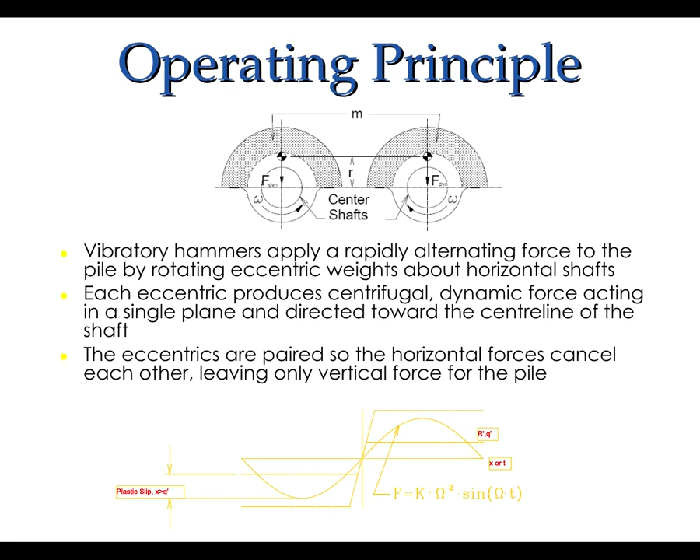To eliminate the horizontal component, which is particularly important with pile driving equipment, we pair the eccentrics and we counter-rotate them, and the horizontal forces cancel out and the vertical forces add to each other, and we get a vertical sinusoidal force. That vertical sinusoidal force then acts on the pile, which in turn acts on the soil.

Originally, the vibratory hammers were developed in the Soviet Union in the late 1940s, they were first put out. But actually, that effort started probably in the late 1930s and went on into the 1960s. It was a major effort on their part, and they pursued it very diligently, actually, and developed a wide variety of vibratory equipment, compactors, vibratory grates for conveyances and that kind of thing.

The first, for pile driving equipment, the first job was in 1949 when the BT5 was introduced, and it had a dynamic force of 214 kilonewtons, an eccentric frequency of 41.67 hertz, and a power of 28 kilowatts. It was at the Gorky, which is now Nizhny Novgorod, hydroelectric development, and there were 3,700 sheet piles, 9 to 12 meters long, and they were driven each in 2 or 3 minutes.

The performance difference between vibratory hammers and impact hammers in the right types of soils is significant, and is one of the reasons why this equipment has, for most types of soils that sheet piling is used in, become used for sheet piling. You also see them in soldier piles and other types of retaining walls.

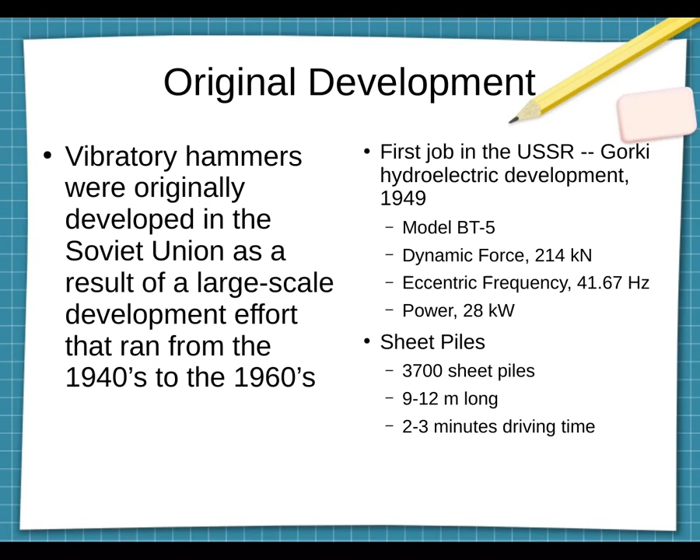This is a diagram of the BT5 vibrator. It shows all the components so that you have the regular vibrator today are there. In the top, you've got the electric motor, which transmits its torque to the gears and eccentrics through a transmission system in the upper left-hand corner.

In the middle, you have the eccentrics, and at the bottom, you have the clamp, which actually attaches it to the pile. The pile has to be attached in such a way that you get bidirectional rotation, bidirectional transmission of force. In other words, you've got up and down forces. It's not like an impact hammer where you just set it on top of it. You've got forces in both directions.

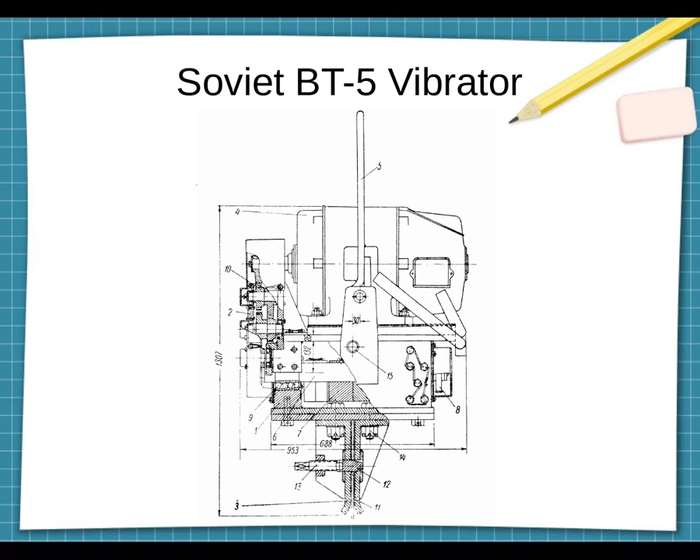The one thing that's missing from this that is more common now is the suspension. And that's normally, there are two reasons why you have suspensions. One of them is to provide extra down weight to help push the pile into the ground. And the other one is during extraction, you use it to dampen vibrations to the crane.

Subsequent developments: they developed vibratory pile drivers for large steel pipes, which are still a very common application for them, square concrete piles, and concrete cylinder piles. Concrete piles are somewhat of a different case because of their large toe areas, which I'll get into. The first vibrator you see is a Soviet B402 pile driver, with a dynamic force of 270 kilonewtons and a rotation frequency of 23.8 hertz, driving sheet piles, Larssen types, in Leningrad, which is now St. Petersburg.

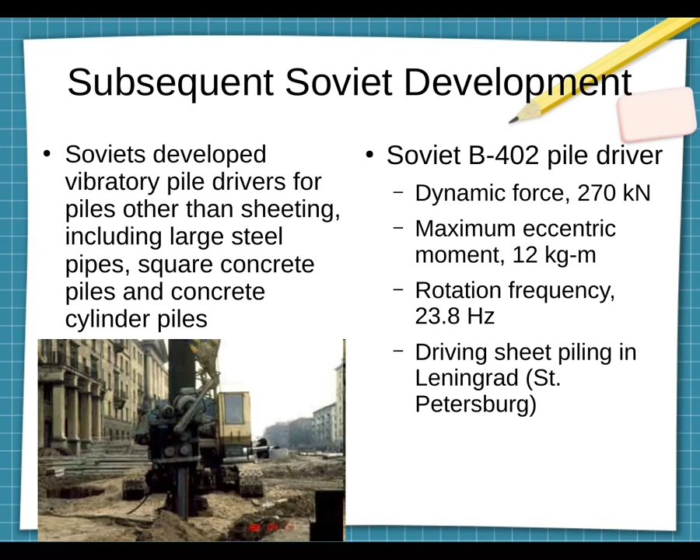The first country that received vibratory technology after the Soviet Union was Japan. They were licensed for it. Many of the Japanese machines imitated the Soviets almost slavishly in some cases. The one exception is the Uraga, which actually reversed the rotor and stator, and became a very unique machine.

Vulcan distributed that in the early 1960s. Western European manufacturers like PTC in France, which is still active in it, and some in Germany like Müller and MGF, also developed this type of equipment.

One thing worth noting is that until the late 1960s, virtually all vibratory pile drivers were electric. There is a movement now to return electric equipment to the job site for purposes of getting rid of internal combustion engines and doing clean energy, and some people say this is very novel. In fact, it is not. We have done electrics with vibratory hammers for a long, long time, and I think that's something that needs to be remembered and that experience built on.

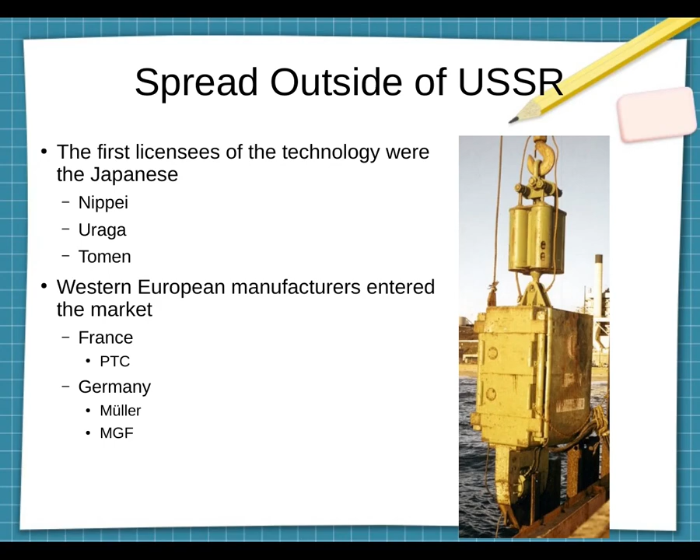In the United States, hydraulic vibratories were first developed. MKT developed the first one; you see a diagram of it from 1969. Then Foster and ICE - that's International Construction Equipment - 216 over there on the far right. Vulcan had a series back in the 1980s and 1990s, and Vulcan Foundation Equipment is once again bringing vibratory hammer manufacturing back to the area. We have HPSI and APE as well.

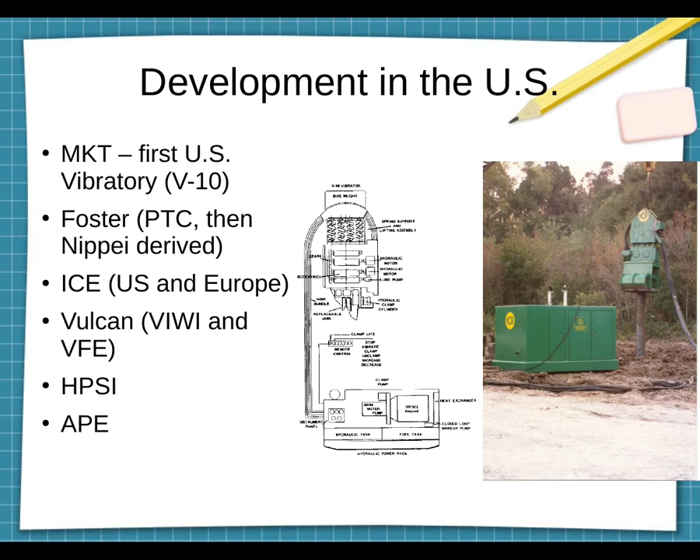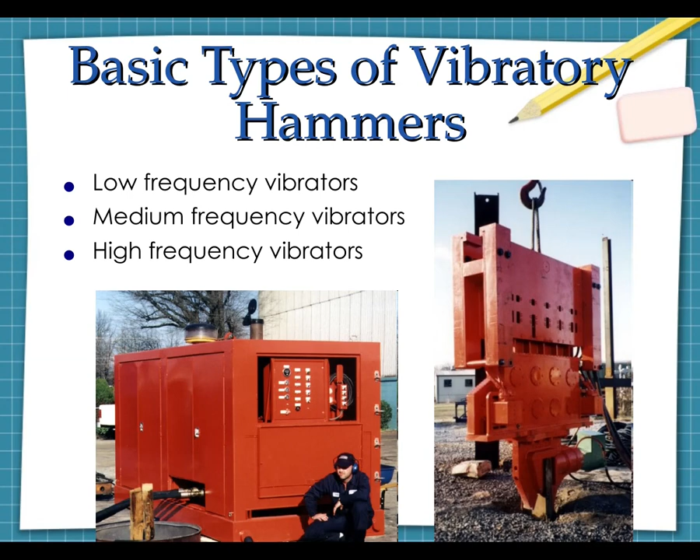There are basically three types of vibratory hammers based on their frequency ranges: low, medium, and high. What you're looking at there is a Foster 4200 unit, which Vulcan manufactured in the 1990s. On the right is basically the exciter. The bottom is the clamp, and above the clamp is the gearbox where your eccentrics are. At the top is the suspension with the suspension springs. On the left is the power pack, a hydraulic power pack. American contractors have traditionally preferred a hydraulic hammer, and this is why they were developed in this country.

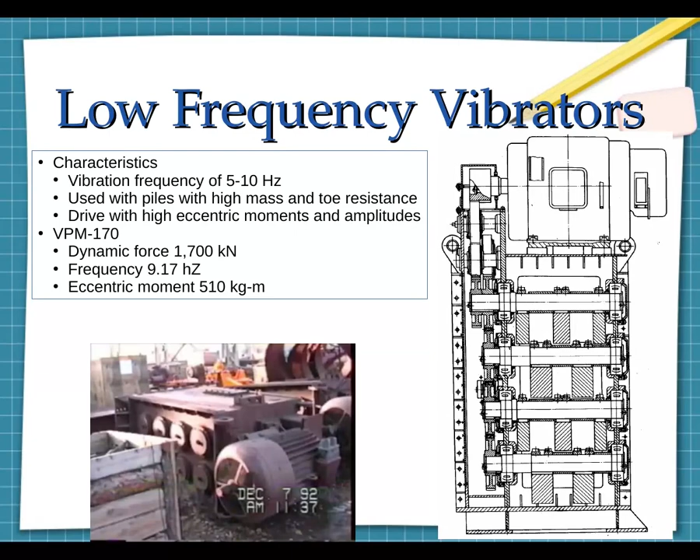Medium frequency vibrators are pretty much the standard. Those are two Vulcans, the 2300A and the 4600, which is driving a large caisson. Development of caisson driving for drilled shafts revolutionized the construction of drilled shafts in the 1970s when the larger vibratories were applied to it. This is the standard range - you have a nice balance of frequency, eccentric moment, and dynamic force, and you can drive a wide variety of piles with these.

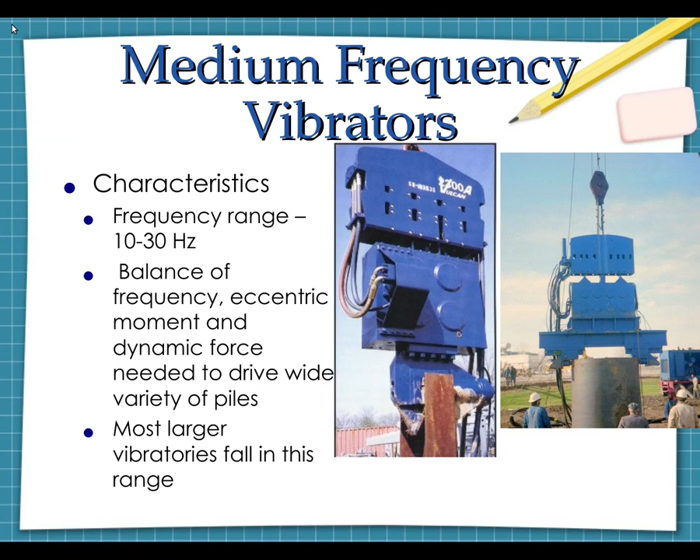The high frequency vibrators break down into two different types: the non-resonant, around 40 hertz, 2400 RPM, normally used to avoid vibrating structures around them. And resonant - traditionally vibratory hammers assume the entire pile acts as a unit, as a mass, but resonant types actually put wave effects into the pile. They've had some acceptance, but they have not made the progress in the industry that some of their proponents would like.

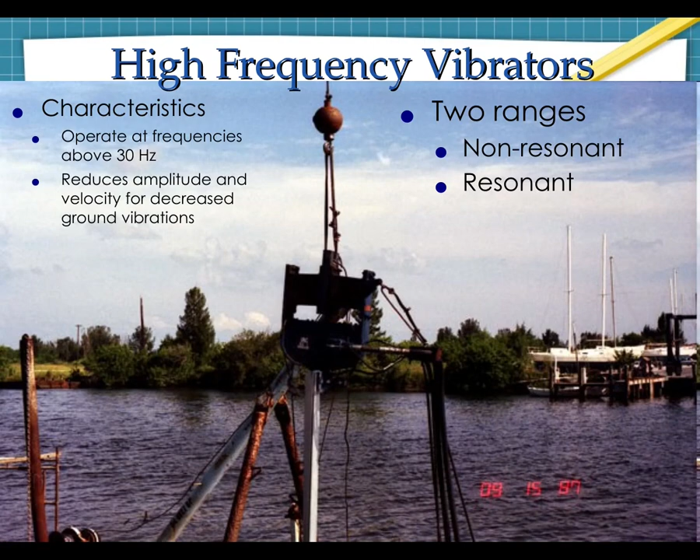Modeling vibratory driving: for purposes of modeling, the simplest model is a dashpot, which is a velocity resistance type of thing. For a liquefied soil, that makes sense, and it's traditionally been used to determine the power requirements for vibratory drivers.

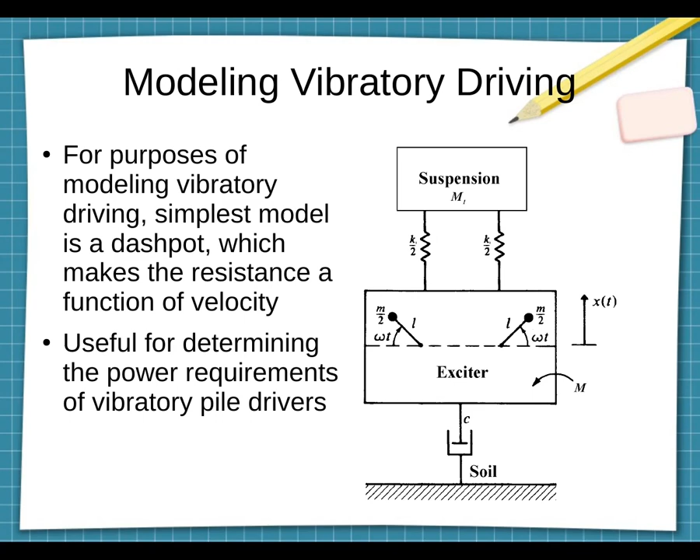Traditionally, we've always assumed that the rotational speed of a vibratory driver is constant. Here, we're going to throw out that assumption. The reason why we can justify that is because the torque is constantly changing in a vibratory eccentric, and because of flywheel effects, we cannot match the torque continuously all the time, so perfectly constant rotational speed is impossible. The question is: is that significant? The purpose of this study is to get to the bottom of that.

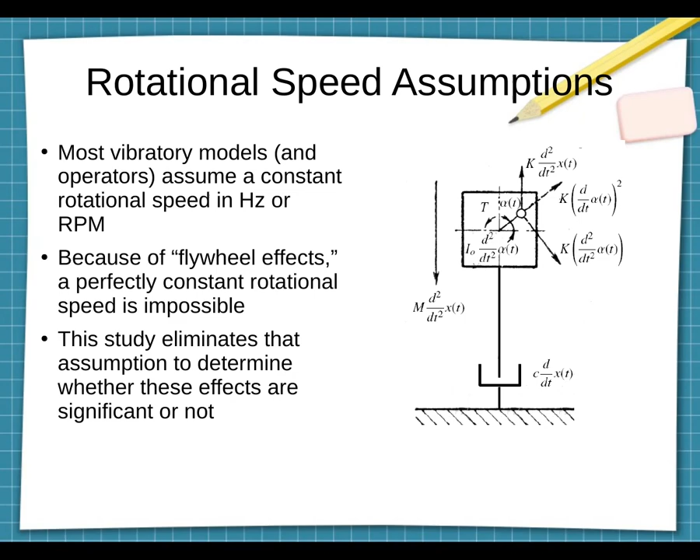The governing equations are these. It's a system of differential equations. The first one is that of the eccentrics. I naught is the rotational inertia of the eccentrics, and T is the torque, which we're going to assume constant.

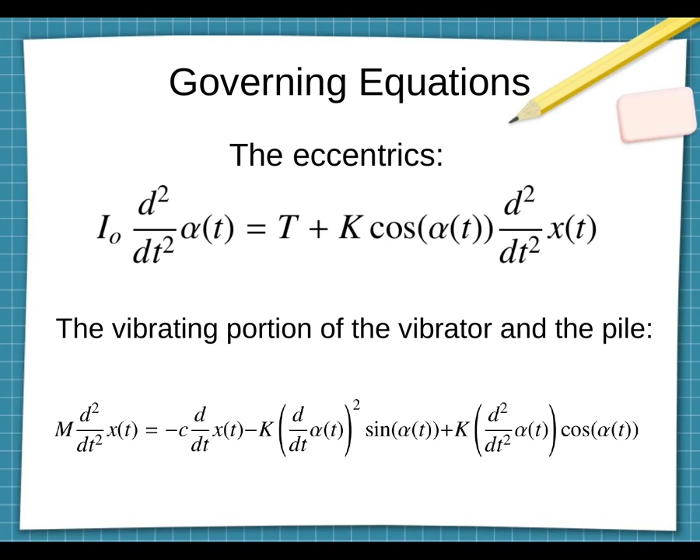K is the eccentric moment, which at any given point in vibratory driving is constant, even though there are variable eccentric machines. M is the mass of the vibrating mass of the system: the gearbox, the clamp, and the pile. C is the damping, which simulates the soil effect. And alpha of T is the angle as a function of time. We can't assume that it's strictly based upon omega, the rotational speed.

First variable change - we're going to make three of them. The first one is to have a dimensionless time, and we'll talk about what W naught, or omega naught, is in a minute. That results in that transformation. This is probably the most difficult from a mathematical standpoint, because time is an independent variable.

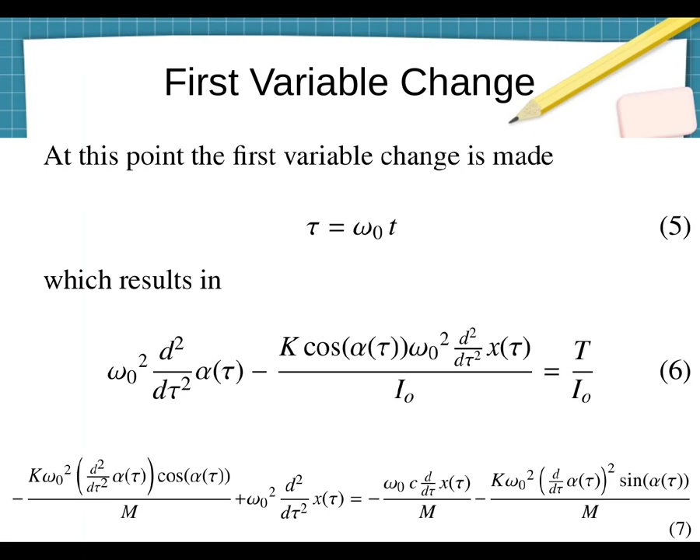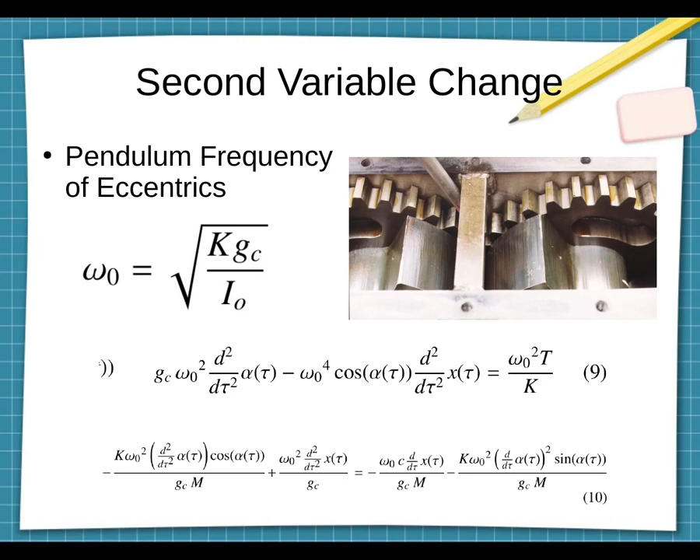And the frequency they rock at is the pendulum frequency of the eccentrics, which can be computed based upon the geometric properties of the gears and the eccentrics. That pendulum frequency is equal to the formula you see, which is a function of both the rotational inertia and the eccentric moment. When you make that transformation, you get those equations.

The last variable change is a dimensionless displacement. We make that change and we get those results. So now we've got a dimensionless type of formulation which we can use for parametric studies.

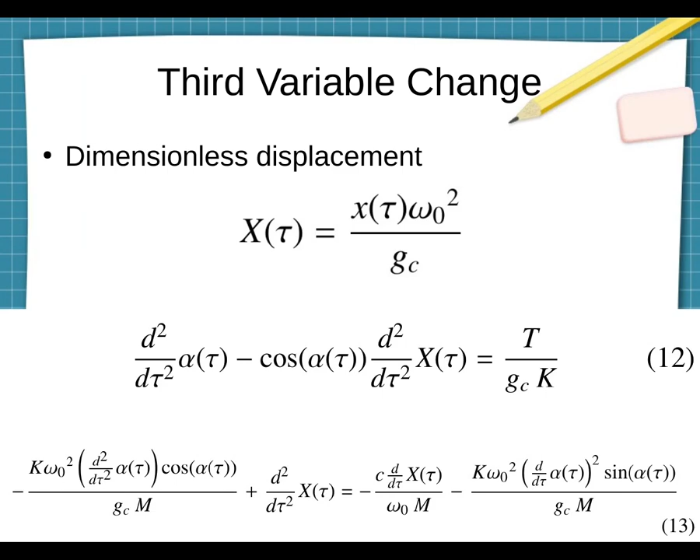We make some simplifying constants. Eta 1 is the torque ratio - torque is constant, K is constant, so we're assuming a constant torque. The torque ratio is the ratio between the torque and the eccentric moment. Eta 2 is the damping coefficient, which makes the damping dimensionless.

And eta 3 is basically the dimensionless expression of a peak acceleration, which we'll get into in just a minute. We make those transformations and get those equations, which are a little simpler in form than the original ones.

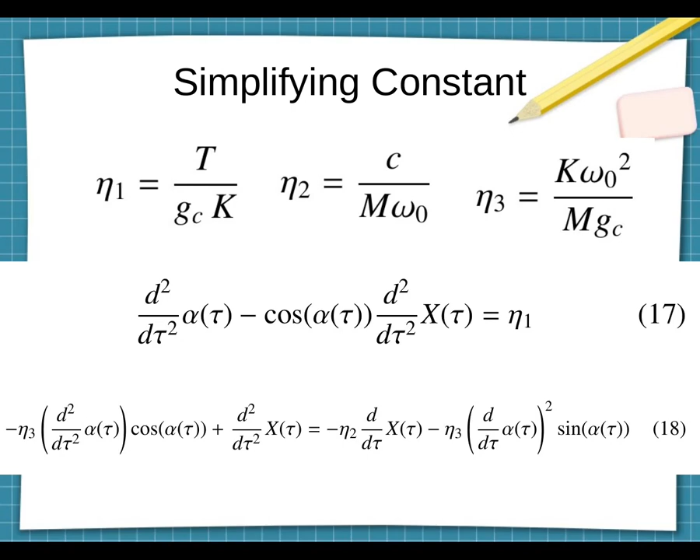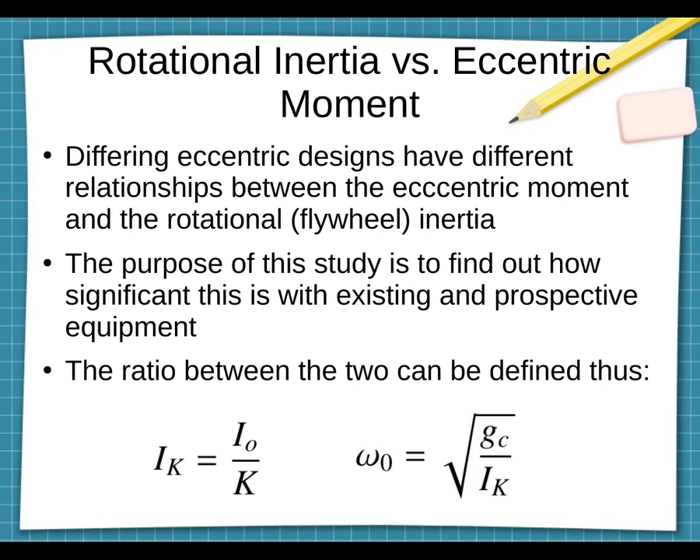Let's do another simplification. You'll notice omega naught is a function of both the rotational inertia and the eccentric moment. We do a little math and define an I sub k, which is the actual ratio, and that ratio in turn determines the pendulum frequency of the eccentrics. We can define those ratios in that way.

From there we make some other simplifications. We have a zeta, equal to C over M omega 1. Omega 1 is the actual target speed of the vibrator. And we define a frequency ratio, equal to RPM 1 - we're working in RPM, it's a little easier to understand - over RPM naught.

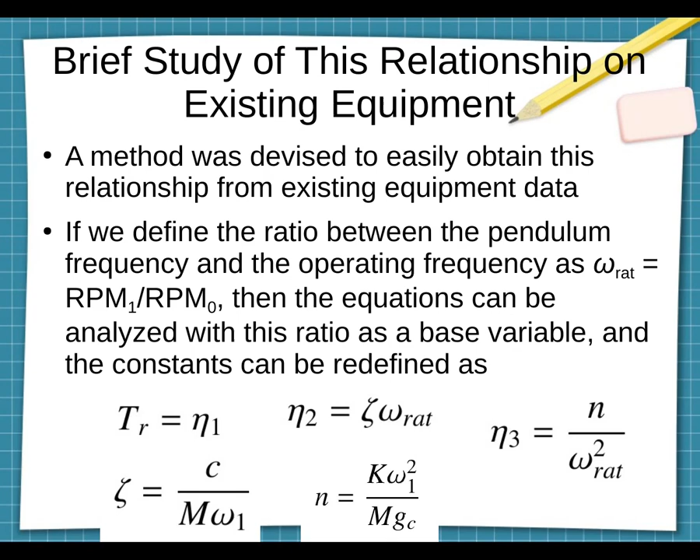RPM naught is the pendulum RPM - the pendulum frequency expressed as RPM. And we have N, which is important because it is the peak free-hanging acceleration of the machine. We make all those substitutions, and the equations suddenly simplify considerably. We can use these now that we have the omega ratio as a parameter.

The equations do not have a really good closed form solution, at least not in the form they're in, so we use a fourth-order Runge-Kutta integration technique. Basically what we're going to do is vary the torque until we get the desired rotational speed.

This is necessary since we have a variable RPM to start with. So we did some initial results: 1600 RPM, N equal to 9, which is a standard value for design, and zeta equal to 1. And to our surprise, even when we vary the pendulum frequencies between 20 and 200 RPM, the results varied very little from if we had assumed a constant RPM.

As zeta decreased, the variation increased. In other words, the lower the load on the machine, the more variation in speed you have during rotation, which is good because obviously you want stability at the very highest rotational speeds.

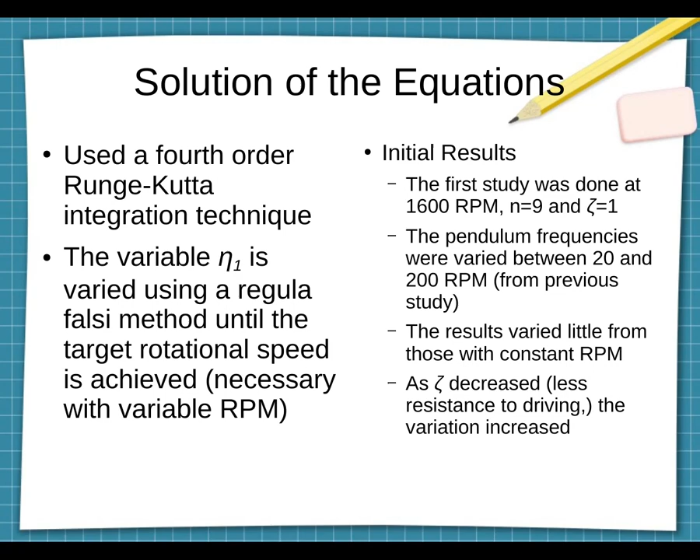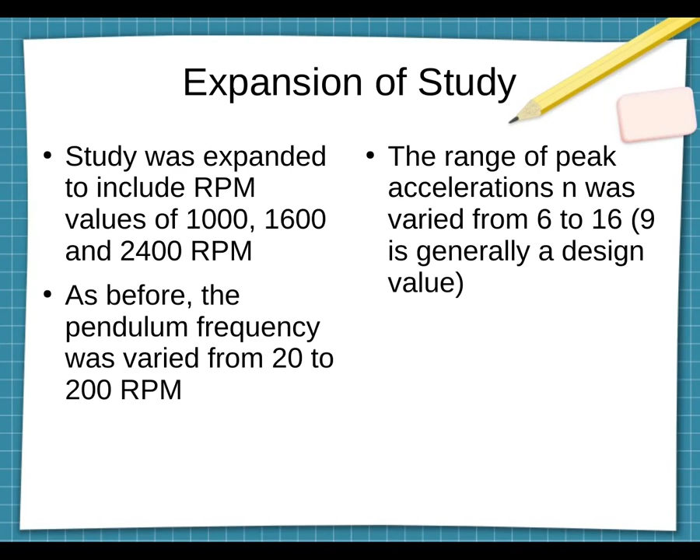So with that out of the way, that was a surprise. We decided to expand to include RPM values of 1,000, 1,600, and 2,400 RPM. As before, the pendulum frequency was varied from 20 to 200 RPM, and we're going to vary the N value as well from 6 to 16. Nine is an assumption - what happens if we change that?

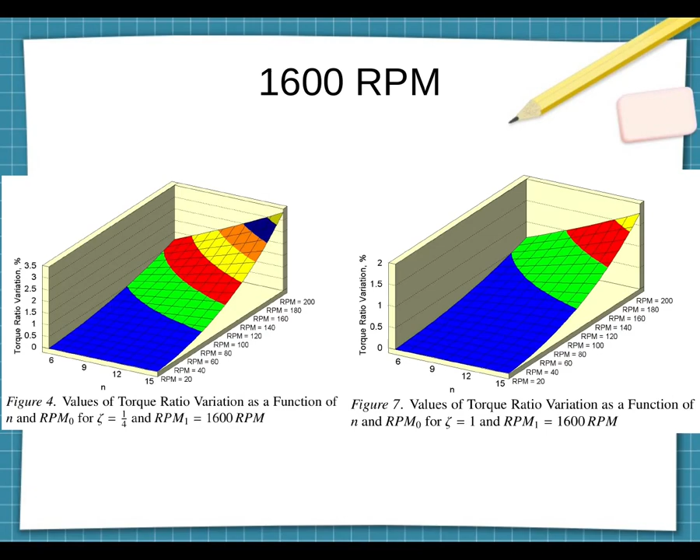We see that we get a torque ratio variation of 3.5%. In other words, to get a reasonably constant rotational speed, the torque ratio varies a little bit. When zeta equals 1 on the right, that drops to a little under 2%. So again, it's more stable in the higher load ranges. For 2,400 RPM, it's actually more stable overall - the further away the rotational speed gets from the pendulum frequency, the more stable your rotation is, the more inertia there is.

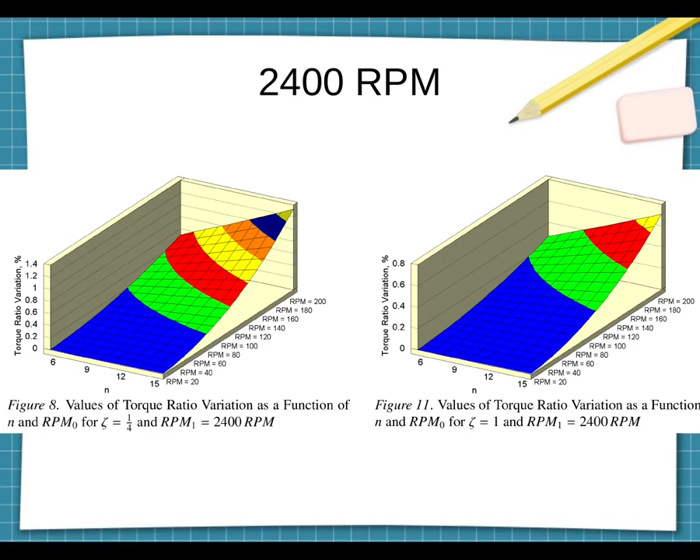By the way, I should add that the RPM range is based upon a fairly brief study, which I discussed in the paper, of various geometries of eccentrics and gears and whatnot. I would say very few vibrators currently on the market have a pendulum frequency much above 100, so that's an extreme high range of pendulum frequency.

You go down to 1,000 RPM, you get quite a bit more variation. And the closer the pendulum frequency is to the operating frequency, the more wobble you're going to get during rotation. That may explain some of the problems they had with the lower frequency machines, why they were not accepted.

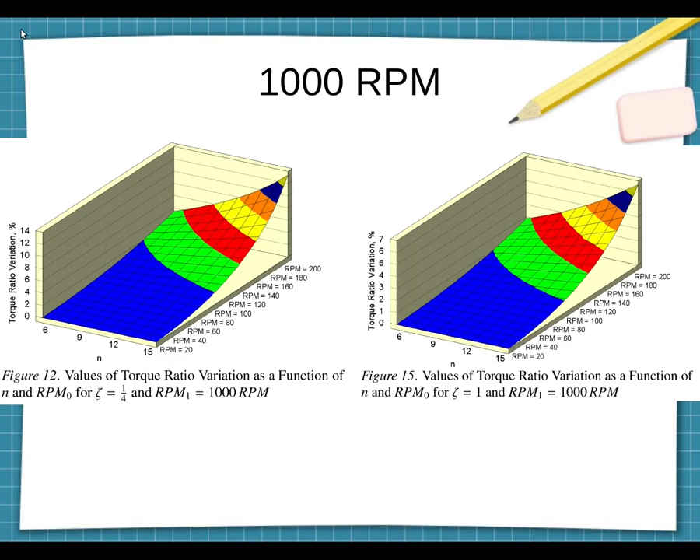Now some conclusions and observations. The velocity-dependent damping is a useful model as a design guide. It may not be effective in situations where you've got rock or IGMs.

As a result, some of the success of the American vibratory hammers, which usually have higher power than some of their other counterparts elsewhere, may be due to the fact that they are more effective in unusual situations - higher acceleration than the user encountered during use. That may be one reason why that is a problem: higher accelerations are actually needed for whatever liquefaction or thixotropy is necessary during driving.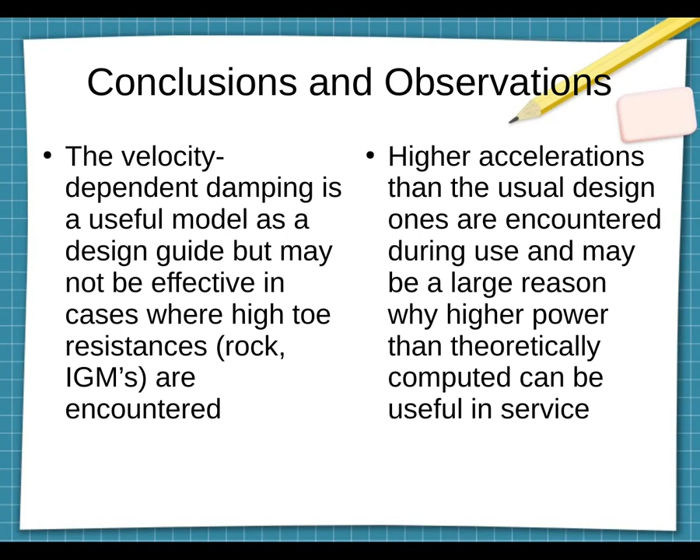The larger the spread between the pendulum and operating frequencies, the less important pendulum effects become. As a rule of thumb, I think the rotational frequency should be at least 20 times the pendulum frequency, and most vibratory hammers achieve that.

There are other sources of rotational inertia in vibratory hammers which will further stabilize the rotation - you can add inertia to the system. And there are other losses as well as far as need for extra power. This is not a large one - you've got losses in the hydraulic system, and if we go back to electrics, we'll have losses there too that are worth taking into consideration.